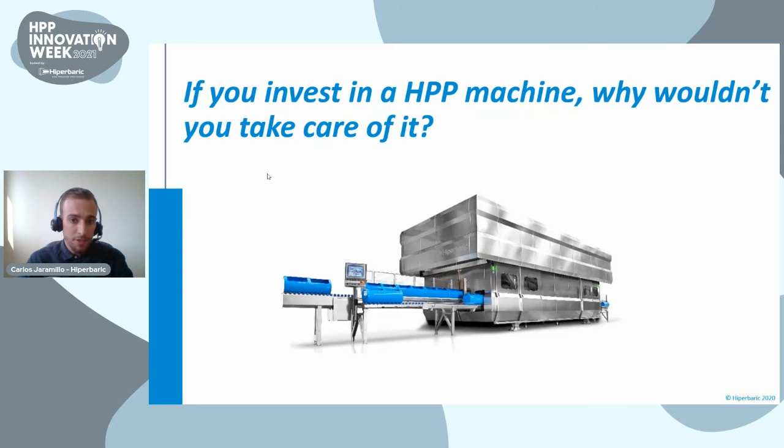So let's go with the maintenance. Maintenance is as important as production. This is the most important dilemma in every company, I think. It's funny when a customer calls me because the production department doesn't allow them to stop the machine, and they ask me if they can continue running with the problem, if it's good to go and safe to continue running the machine with the issue they are having.

So don't call me again with this question, because my answer is always the same. I recommend you always solve the problem as soon as possible and on time, to prevent a minor problem from becoming a major one. I understand the need of production, and I think it's most important that the product gets processed on time and customers get the product on time. But if the machine is not running properly, you will experience a lot of unexpected downtime and problems in the machine.

So here are some points in regards to this topic. Do you follow a preventive maintenance plan? A preventive maintenance plan, as you know, is very important to prevent unexpected downtimes.

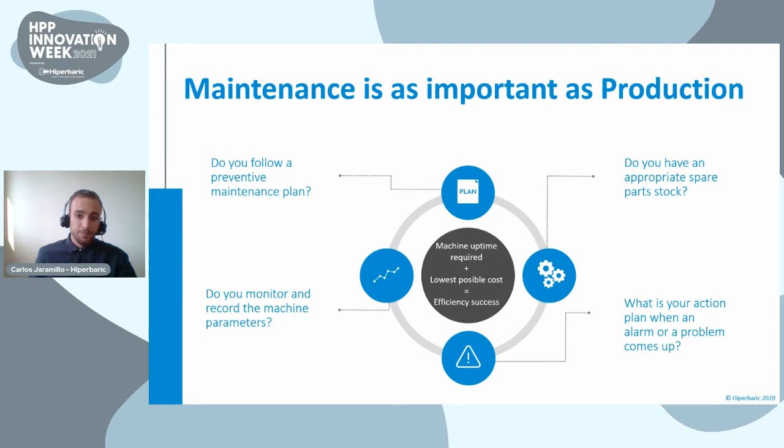So I think it's really important to have a high-level maintenance team if you want the machine running in good condition and have high performance. I think this is a very important part. The first point I consider important is to train your team.

This would increase motivation in the team, reduce downtime in the machine, and give you effective use of resources at your company, with the team following good practices while working on the machine. Second point: actions taken in time.

This will allow you to reduce maintenance costs, improve machine performance, and avoid unexpected downtime. So it's another point that is really important.

Third point I consider important is that procedures are followed. If the technician follows the procedures, you will avoid a lot of problems, because this is not common equipment. You need to follow the instructions and procedures to install the parts. This will allow you to reduce maintenance costs also, and you will avoid losing warranties.

If you are installing the parts in the correct way, you can ask for warranty if something lasts less than expected or something like that. But if you are not following the procedures, well, you need to change your mindset and follow the procedures to avoid some problems.

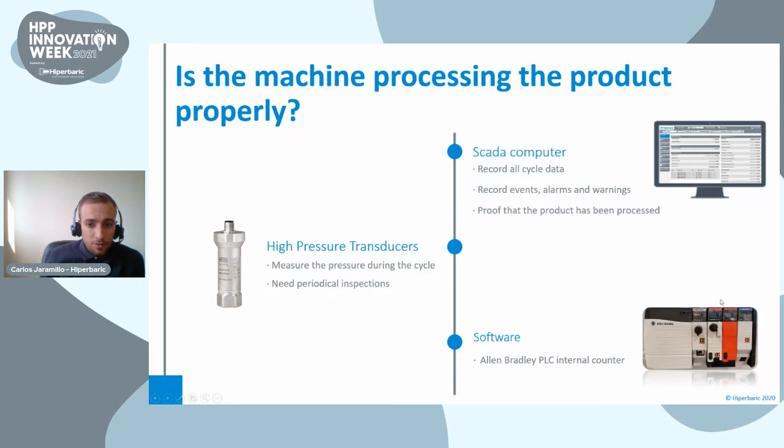We currently have Allen Bradley PLC with the internal counter. I think it's the best for our application. So this is another important point in the machine.

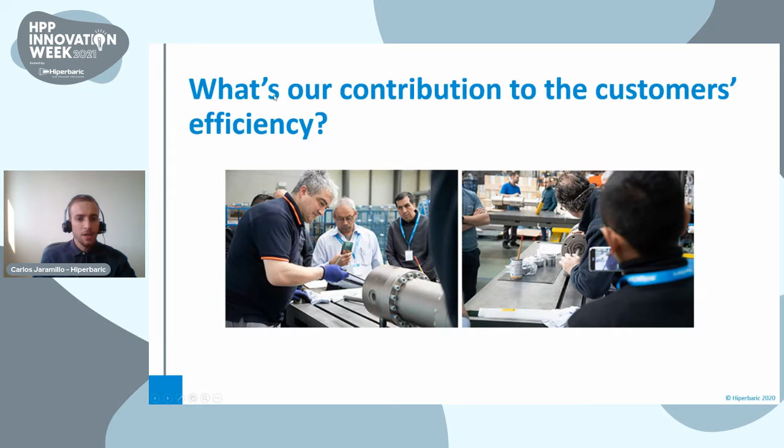Next: what's our contribution to the customer's efficiency from Hiperbaric? We have two important departments constantly in contact with the customer: the 24/7 after sales team and the spare parts service department. Let's start with the first one, after sales service.

If you join the Hiperbaric family, you will have 24/7 after sales service at no cost for you. You can call whenever you want, whenever you need help, and you'll get an engineer on the other end of the line helping you with the problem. We have connection to all the machines and can monitor the parameters, so we can help you in the best way, because we'll be seeing the same thing you are seeing. This is really important to resolve customer problems in the quickest way.

And we are a proactive service. We don't just help you solve the problem, we also recommend something to prevent the problem from happening again.

A spare parts service. Our goal is to ship any part to anywhere in the world in less than 24 hours. How can we do that? We have warehouses in Spain, the United States, Mexico, and New Zealand.

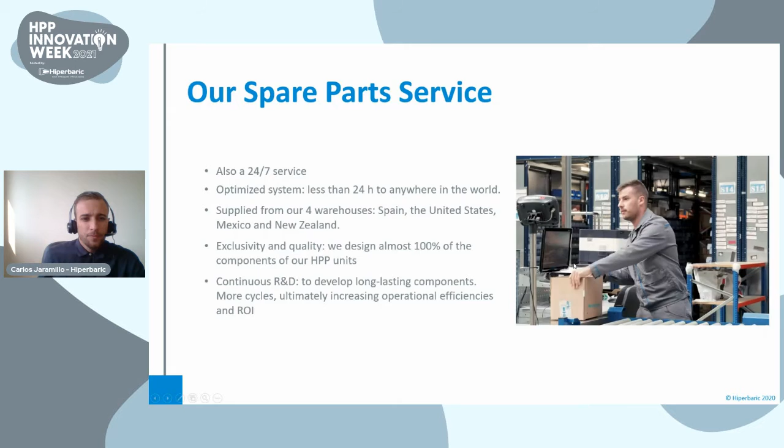Finally, I think this is the most important application for customers: our Hiperbaric portal. With this portal, you can do almost everything. You can order parts in real time. You don't need to send an email to spares or call spares to order a part, you can place your order through the portal. You can check all the technical information and share it with your team - maintenance videos, technical instructions, common queries, everything like that. So you have almost everything here.

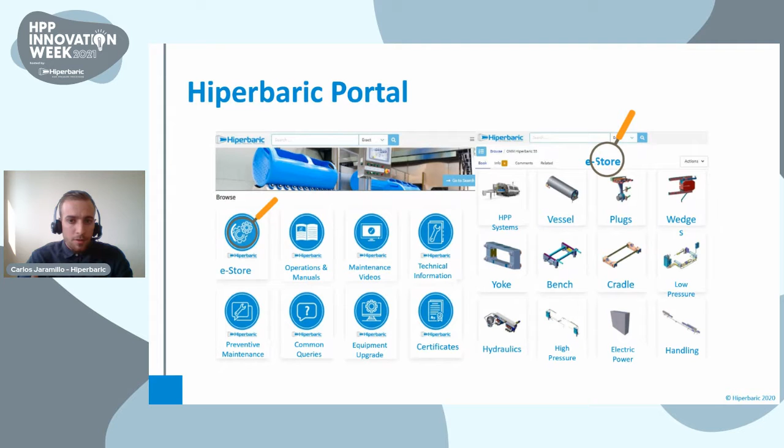So you don't need to call Hiperbaric or send an email. This is really nice for the customer because they don't lose time contacting Hiperbaric and asking for instructions. They can just go through the portal and get whatever they need.

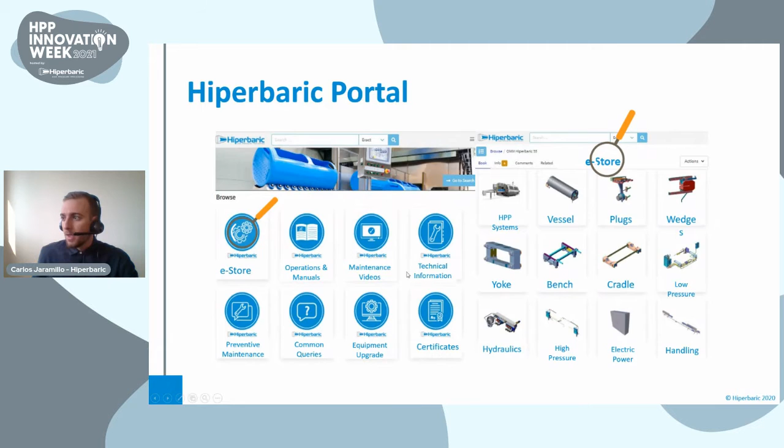I would like to say that this year we have won awards: Organization of the Year in regards to after-sales service and spare parts service, given by the Business Intelligence Group. This is a really important award for Hiperbaric and the service team and the spare parts team.

Finally, I would like to finish the presentation with a poster that is in most of the maintenance rooms on the wall: if you don't schedule time for your maintenance, your equipment will schedule it for you. So thank you so much for your time.

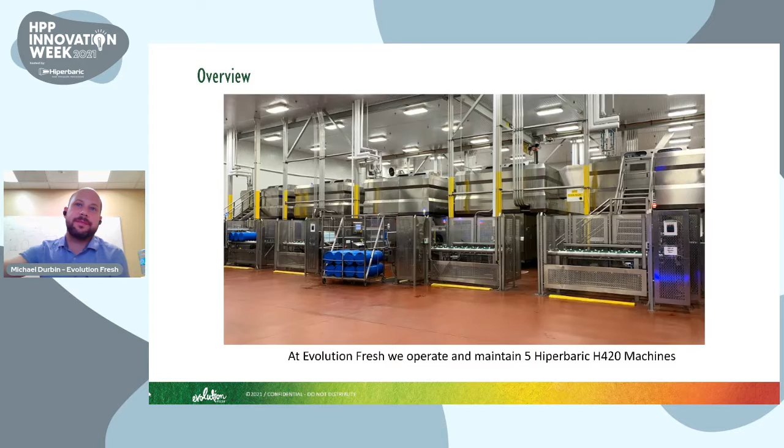Basically, we're making these blends, we're bottling them, and then we're running them through our HPP equipment. So we're responsible for more than just taking care of our HPPs, but we have maintenance staff that's taking care of our entire facility.

Training is one of the most foundational things about running an efficient HPP operation. Our HPP operators undergo an extensive training regime prior to operating a machine on their own. They learn about safety on the machine for lockout, tagout, chemical handling, and ergonomics. Quality is important since HPP is part of our HACCP plan, it's a critical control point for us, so they're trained extensively on that. GMPs, since this is an FDA regulated facility, and allergen controls.

They also learn from an operations perspective the layout of the room, the methods, which are different processing pressures and times for different products. And then there's a certification quiz to kind of wrap it all up.

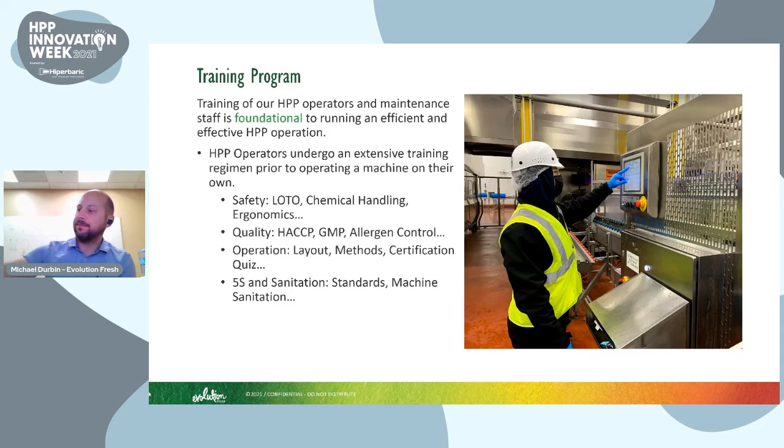When it comes to the maintenance mechanics, they are also trained extensively on those things that the operators are trained on, but then there's an entire additional skill set that needs to be acquired for them. They need to learn how to rebuild discharge valves, check valves, how to install these things. The intensifiers have a lot of different components, such as high pressure seals, oil filters, hydraulic caps, and the plungers. All these things are important to making sure that the machines are running efficiently.

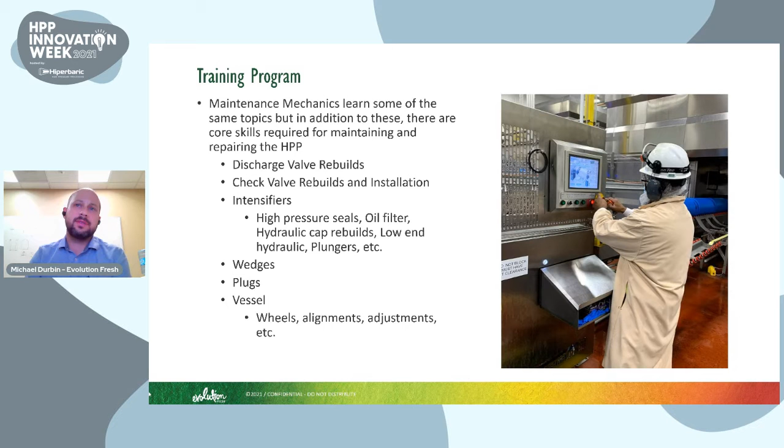The wedges, the plugs, the vessels, all these need to be aligned so that the machines stay up and running. Wheels occasionally need rebuilt, and other adjustments need to be made. Carlos had spoken a little bit about the high pressure transducers, so we also do regular calibrations on those as well, about every 3 months.

So after you have your team trained up and you're running your HPPs, it's really important to monitor for performance. In order to know how your operation is doing, you've got to put some tools in place to measure how you're doing. A few tools we use here is OEE, or overall equipment effectiveness. This number will tell you all in how you are doing, with changeovers, downtime, and other inefficiencies in your operation. So I have an example here to the side of one of our HPPs.

Another important thing, and this is what we started with here at Evolution Fresh, was how many cycles did we run, and were they good cycles or bad cycles? Here you can see on this particular day that we ran 452 cycles in a 24-hour period, and of those we had 2 red screens or failed cycles. That's a pretty good day, but it wasn't always like that. There were days where we would have multiple red screens on all the HPPs.

Another thing that we've just started looking into and benchmarking is our time to reach target pressure. This time identifies where there may be needed maintenance to improve the time that the machine takes to reach that set point. I'll talk a little bit more in depth on that later.

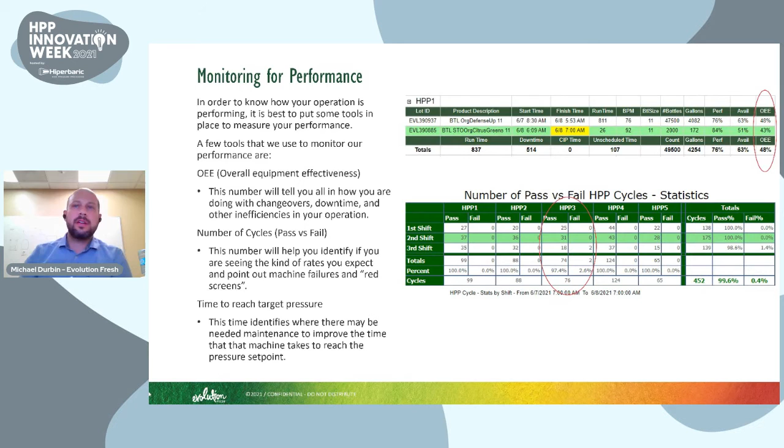Another part of monitoring for performance is the visual inspections. You need to be around the machines and paying attention to the things that you're seeing. These are more reactive types of maintenance techniques, but also need to be part of your program. So the operators or maintenance staff should be walking around the intensifiers, looking for leaks, checking gauges, and making sure everything's running right.

Another thing you can do if you have a continuous improvement culture, or you're trying to move towards that, is a TPM system, or total productive maintenance. This is a way for you to quickly identify if you have an oil leak or water leak. If you keep everything clean, when something shows up like an oil drip or water, it's easy to quickly identify that and get to the problem.

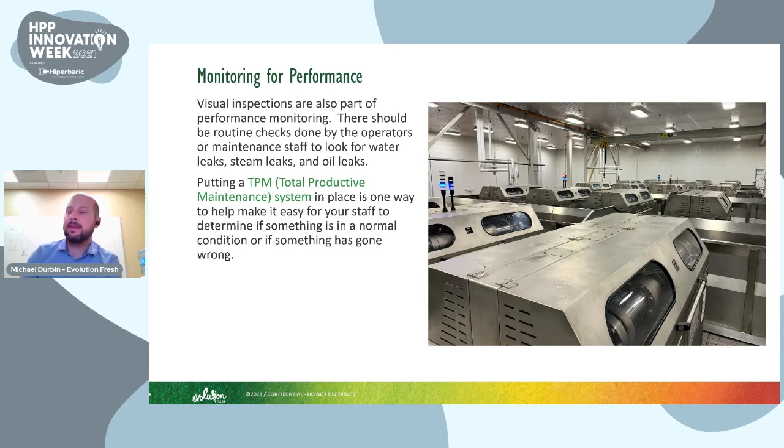So, preventative maintenance. I really like the poster that Carlos had at the end there about if you don't schedule your downtime, your machine's going to schedule it for you.

Our preventative maintenance program is built into our production schedule. We communicate out, on a shift-to-shift basis, if we have a PM coming up for the day or for that week, and what kind of PM it is. Maybe it's a high pressure weekly, a bi-weekly, or a larger PM, like a 5, 10, 15, 20K PM.

The daily PMs are very basic and can be performed by well-trained operators, and this would also be in line with the TPM program that you may want to implement.

All of the PMs are critical, and they should be factored into your factory's overall capacity so that the HPP machines are not neglected. You don't want to think you can run 24/7 without ever shutting down your machine and plan for that to be your capacity. You really have to build that downtime into your capacity modeling and make sure you have the right amount of equipment for your operation.

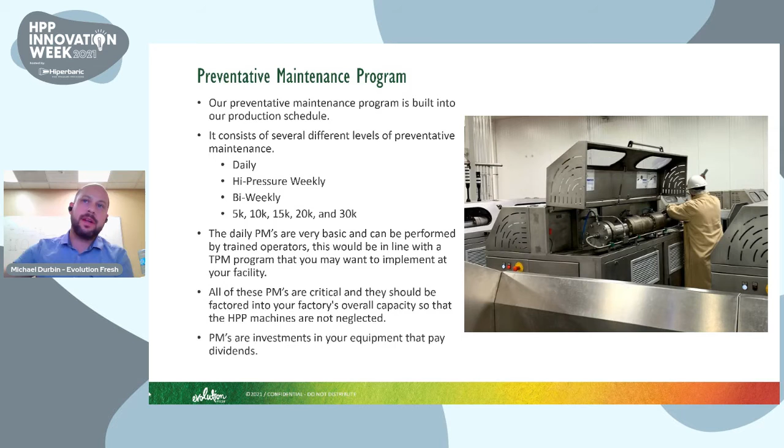PMs are an investment in your equipment, but they pay dividends. If we're not investing in our equipment and constantly reinvesting in it, it's going to cost us. But if we take that little time up front with our preventative maintenance program, it really makes the machines run well, and it also helps the operation.

There's also a lot of things that need to be done offline. Shop rebuilds, like the check valves, we make sure those are ready to go so they can be installed offline. Having the parts ready, so having an MRO, or maintenance operating inventory of spare parts, making sure you have everything you need, pipes and tees, and so many components.

In our shop, we have places where we can mount and rebuild intensifier pumps offline, or rebuild the check valves. We have kits set up for that, and then we have bins to sort things that are ready or might need inspected or rebuilt, just to keep the place clean and organized.

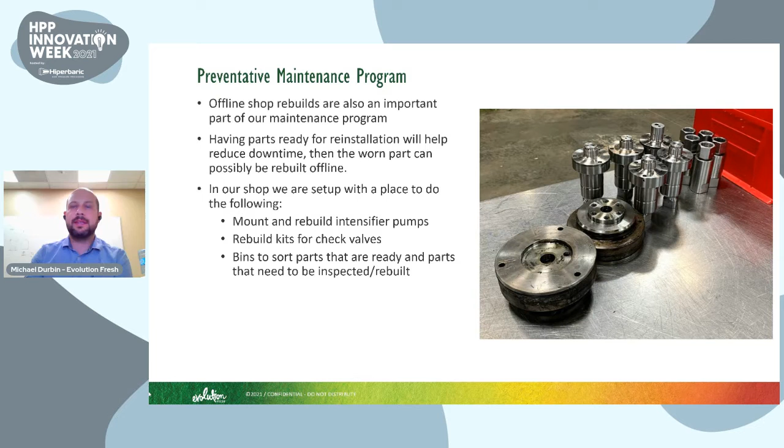So a little bit about advanced analysis. After you have your operation up and running, and you feel like everything's smooth, there's always things you can do to get better. So what we started doing is looking into...

Our time to increase to our pressure set points. We use data gathered over several months, and we processed that in some statistical software, and started looking at our low-hanging fruit and where we could really put our maintenance resources to make our machines run more efficiently.

We use control charts, I charts, box plots. All these are different statistical measurement tools, and that helps us really prioritize what we need to do.

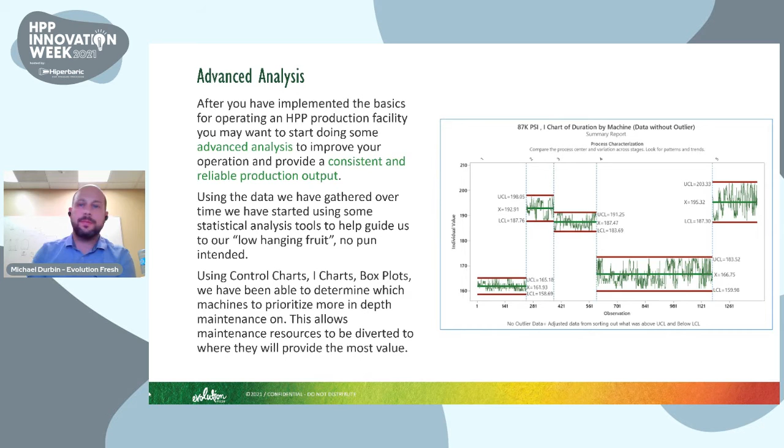So in conclusion, all in all, it's no small undertaking running a large HPP operation like we have at Evolution Fresh, but it can be done with the right planning and resourcing.

You want to make sure you prioritize your training, make sure your staff has the knowledge they need to operate and maintain the equipment safely and with a heightened sense of quality. For us, it's a CCP, a critical control point, so it's very important.

You want to make sure you're monitoring your performance using industry standards like KPIs like OEE. And you want to create robust preventative maintenance programs to keep your equipment in top operating condition.

And then as you get all that set up, you may want to look at continuous improvement tools such as TPM, or doing A3s and analyzing some statistics to take your operation to the next level. So that's all I have for you today.

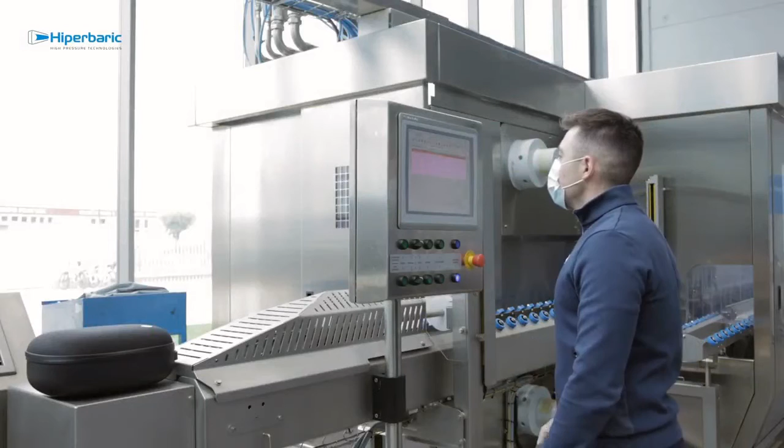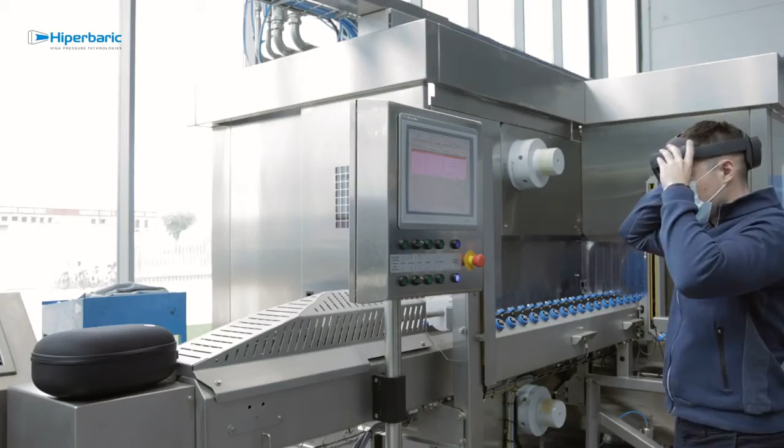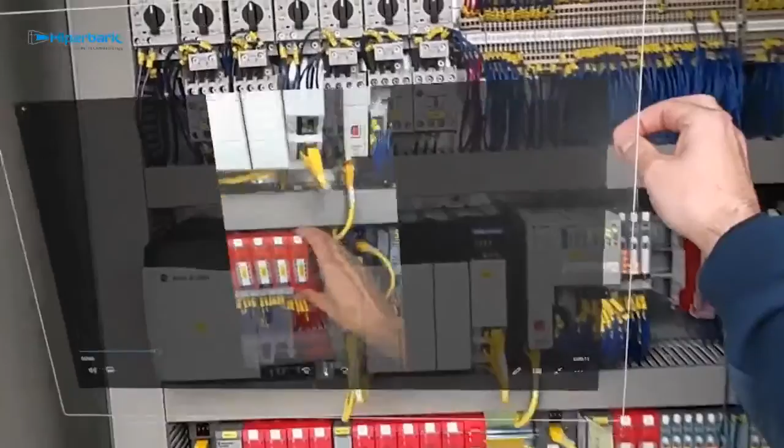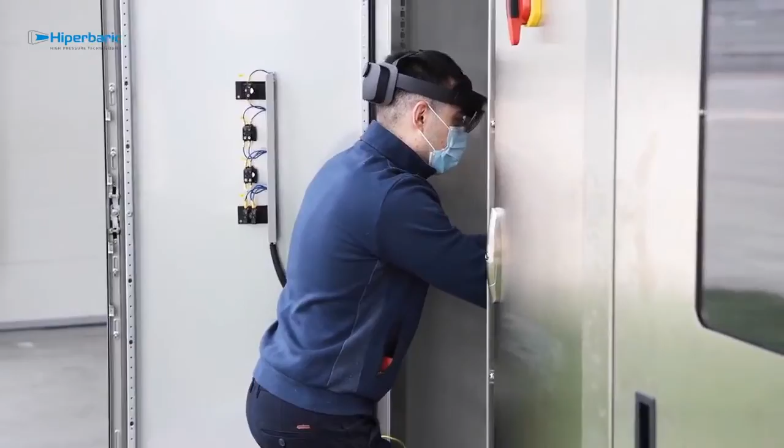With the Remote Assist service from Hiperbaric, we offer a qualitative leap in the support service to our customers. We anticipate the future with our mixed reality devices, and we help technical teams adapt to different scenarios in their daily maintenance operations. Our augmented reality video call service allows you to collaborate and solve problems in a shared mixed reality environment, being in different physical locations. When a field technician is working on a machine and encounters a complex incident, he will have the real help of a Hiperbaric after-sales service specialist, thanks to our augmented reality devices. This remote service can be performed hundreds of kilometers away. Through the device, in a moment, they can share what they see and evaluate the situation, so as to work collaboratively in the resolution of incidents. We provide assistance at work with step-by-step instructions, right where maintenance is performed. Companies will be able to resolve their incidents faster and in real time, taking advantage of the knowledge of our after-sales service engineers.

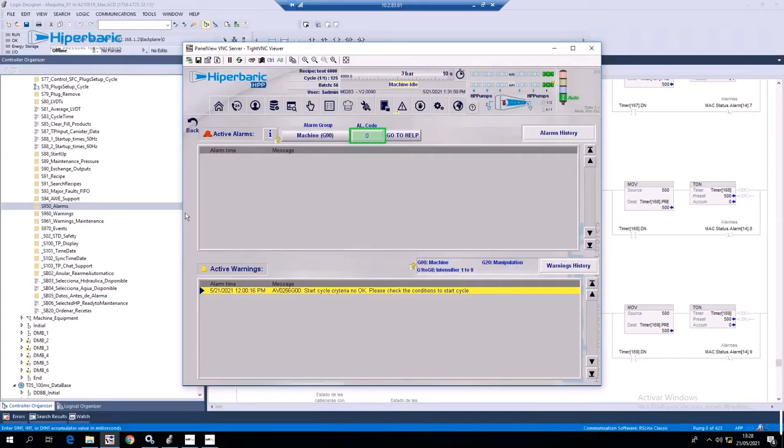Hiperbaric: more connected, more informed, and more efficient.

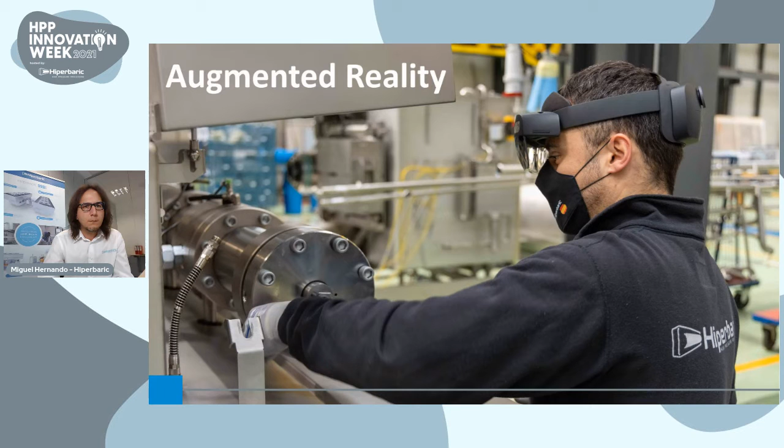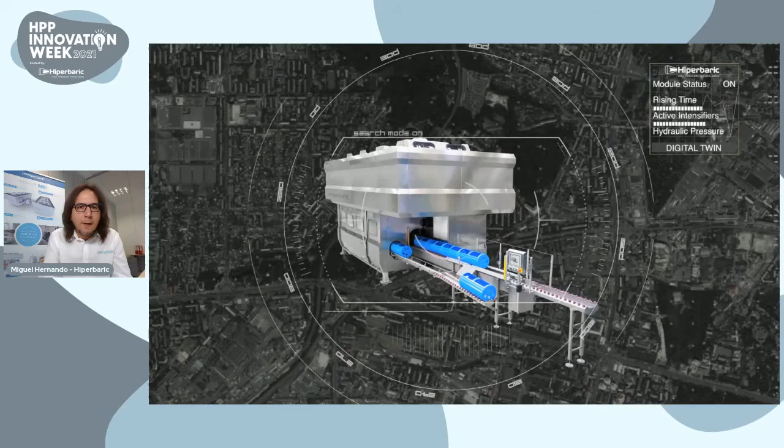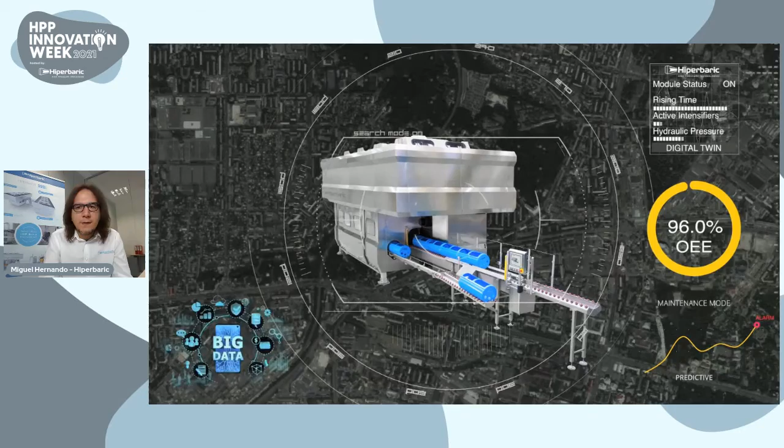Let's talk about edge computing. Edge computing is about bringing processing power as close as possible to where the data is being generated. In other words, it consists of bringing the cloud closer to the user, to the very edge of the network. Combining this technology with machine learning algorithms, it allows us to process data generated by a local device, such as the PLC of our machines, and make decisions in real time in a matter of milliseconds. In short, transform thousands of data points into useful information in real time. Here you can see a small sample of what our engineers are developing during these days, and that will be the future of our units.

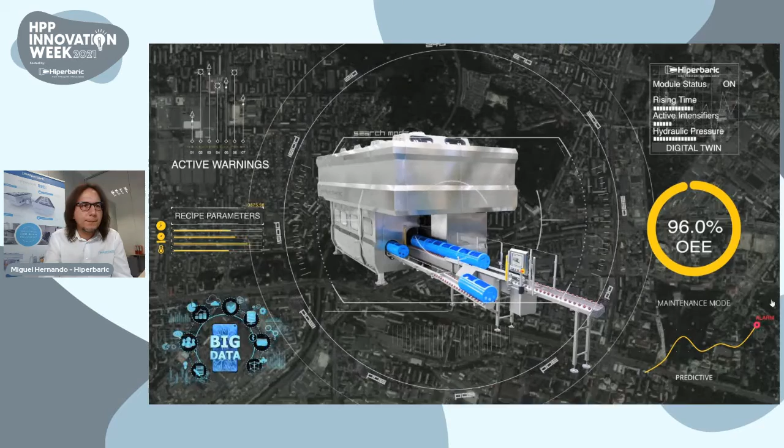Regarding big data, this is being a solid base from which to build the reality of predictive maintenance. At Hiperbaric, we have a database of operating parameters of our HPP machines, which has allowed us to interrelate them and create algorithms to predict future behavior. For example, when will be the optimal moment for replacing a hydraulic pump, or when I have to plan my next plate alignment.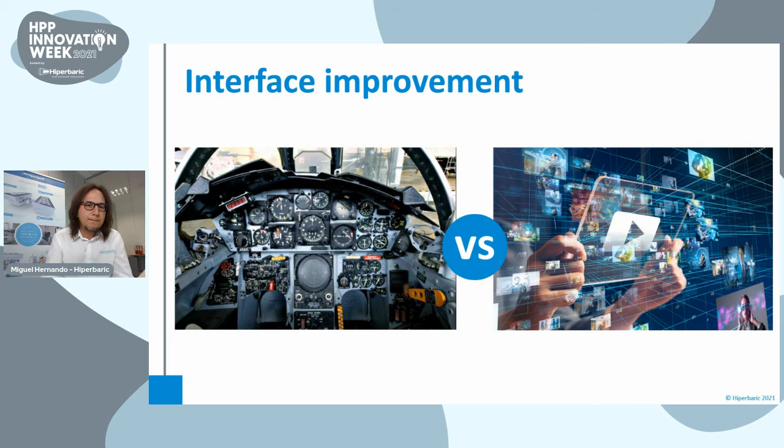Auto-diagnosis: those of you directly involved in the maintenance of the machine might tell me, okay, this is all very good, but what happens when the machine stops and we need to detect the cause as soon as possible? Well, this is a very interesting question. All of the technologies related to data capture and processing can also help us in these repairs. At Hiperbaric, we are working on a special alarm self-diagnosis mode in which the equipment will be able to show the user the exact situation of the machine, parameters out of range, the root causes of these deviations, etc. This will undoubtedly mean a before and after in the way of diagnosing incidents. And this will be ready very, very soon.

In this new Industry 4.0, energy efficiency will be one of the key factors, since it represents one of the great competitive values between companies. Those that best adapt to market trends linked to sustainability will have more possibilities to continue growing and advancing. Hiperbaric is no stranger to this reality, and its engineering team is constantly working on new, much more reliable and efficient electromechanical systems: high-efficiency electrical motors, consumption control devices, software with a focus on energy efficiency, or more innovative examples such as a special eco mode of our machines in which the optimization of resources is prioritized.